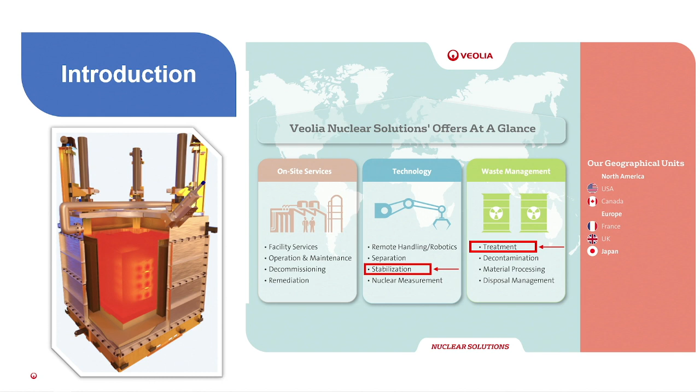And so in regards to this presentation, what we're going to cover is the two areas. One from technology, which will be GeoMelt, which I'll cover here in more detail. And the second of which is the waste management business line, which is truly the treatment aspect of using the technology to treat various waste streams.

So before we get into GeoMelt, let's talk a little bit about vitrification and the value of vitrification and why it's important. It's important to note that vitrification in the nuclear industry is the gold standard for treatment. And why is that? It simply provides the most stable form to allow for radioactive decay over time, which is our friend in this industry, obviously. Being able to stabilize waste in a durable glass form that lasts for thousands of years and is resistant to leaching is why it's important. It's also a robust process that significantly reduces the volume of waste compared to other methods.

And so one example of that, I know it might be hard to see on the screen, is to take an example of waste that we have at Fukushima that will be treated, in this case spent media that was used in the water treatment process after the accident, where you have a little over 9 cubic meters of waste. If you take that waste and you were to cement it, you have approximately 9 boxes of waste, versus if you were to vitrify it, you come away with 1. So that just gives you an idea of where the volume reduction comes into place and the advantages of vitrification.

So now let's talk a little bit about GeoMelt. But first, it's important to talk a little bit about the history. GeoMelt was actually invented in the U.S. by PNNL, the Pacific Northwest National Laboratory, near the Hanford site back in the early 80s, long time ago. It was commercialized in 1993. There was a period of technology advancement, mainly for what we call in situ vitrification, so treating contaminated soil in the ground through the process. That technology continued to develop and mature to the point where it transitioned to a secondary processing step, which we call in-container vitrification, or what we do more commonly now is melting waste in a box.

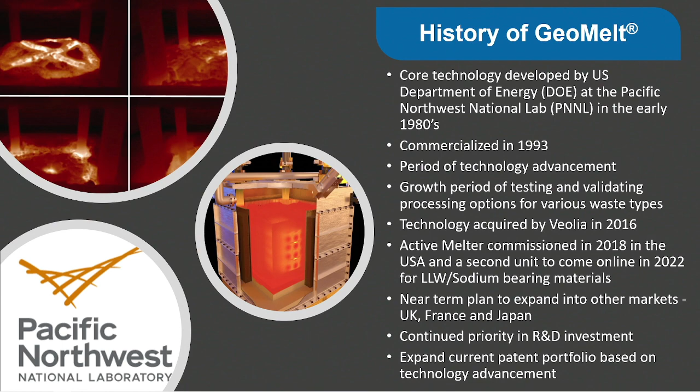One big aspect of our company, Veolia, we invest very heavily in R&D. We invest very heavily in our IP portfolio to continue to refine the process, make it better, find different ways of treating various waste streams, especially the more complex waste streams.

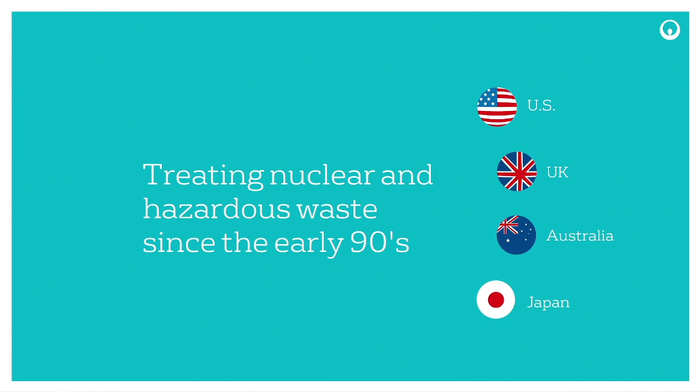And now we'll show a quick video here just about the process itself and what GeoMelt has to offer. So it is a joule heat melt process. You'll see some pictures, but what we use is electrode feeders that go actually into the melt box itself or into the ground itself to joule heat the waste or the area that may be contaminated.

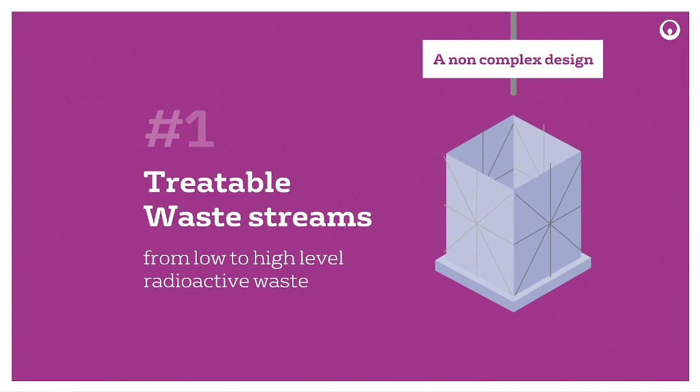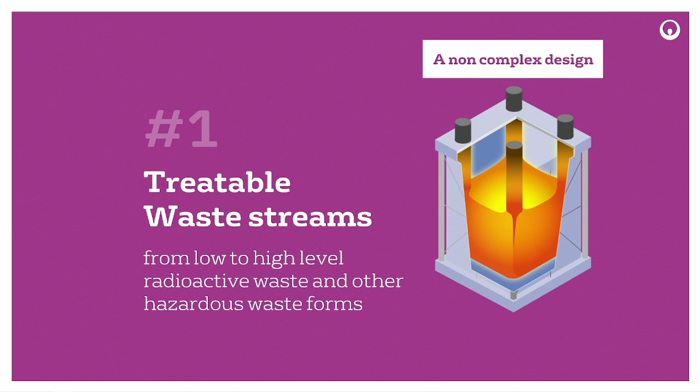In this case, you see the box itself here. We can treat anywhere from low-level problematic waste to higher level waste. So what do I mean by that? Sodium contaminated waste is the project that I mentioned earlier, but we're also treating and testing our different waste recipes or formulas for treating higher level activity waste, such as that at Fukushima for cesium contaminated waste in the media that I mentioned earlier.

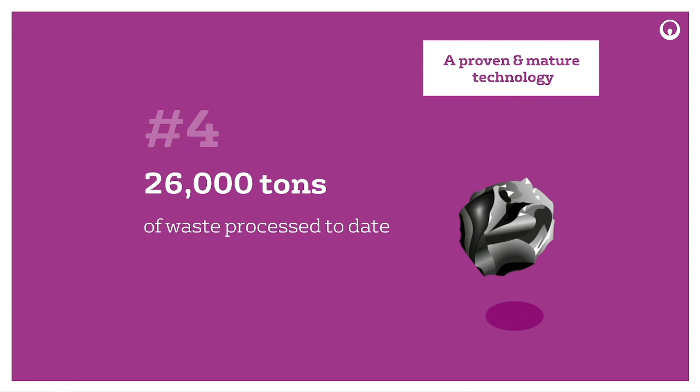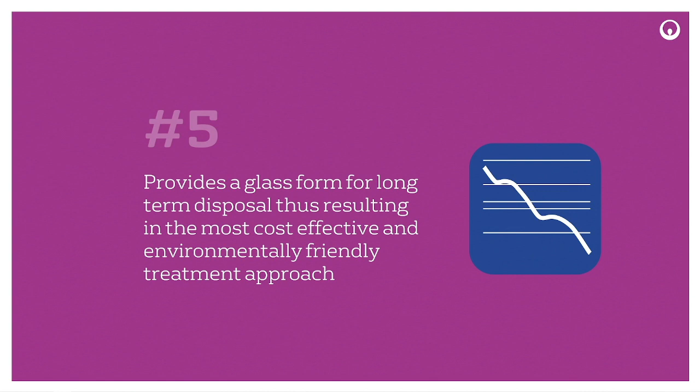So that is an example of the in situ vitrification or in-ground, mainly used for contaminated soils. And it is a robust process. It's a proven process. So 26,000 metric tons of waste have been processed to date. About 50% of that has been radioactive material. So not everything has been radioactive. Some has been hazardous waste material as well.

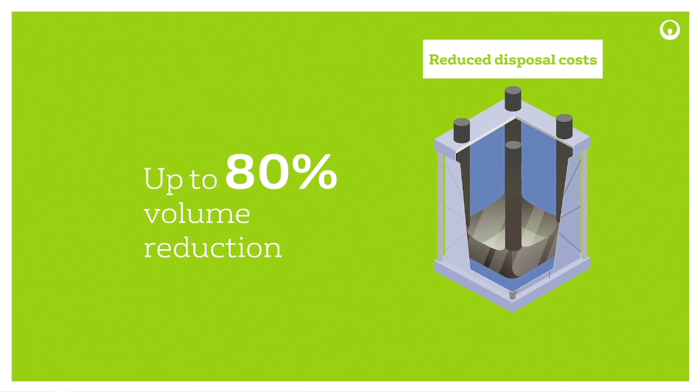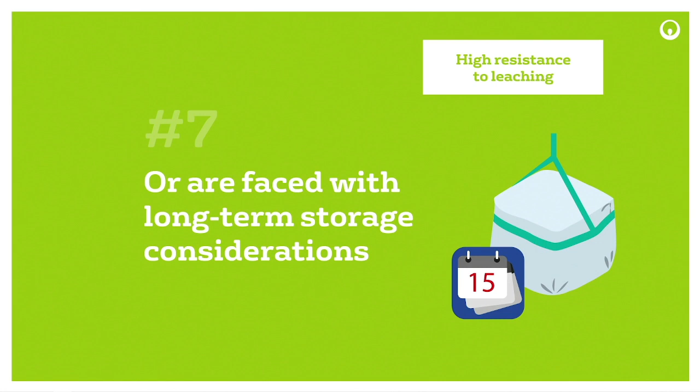So I mentioned the volume reduction, the advantages of that are you can get up to 80% volume reduction. Not only that, but once you do get that reduction, you can actually reuse that same box so you can get full capacity in your waste package before disposal. Okay. So here's another picture just showing some of the advantage of that, the two methods again for vitrifying waste.

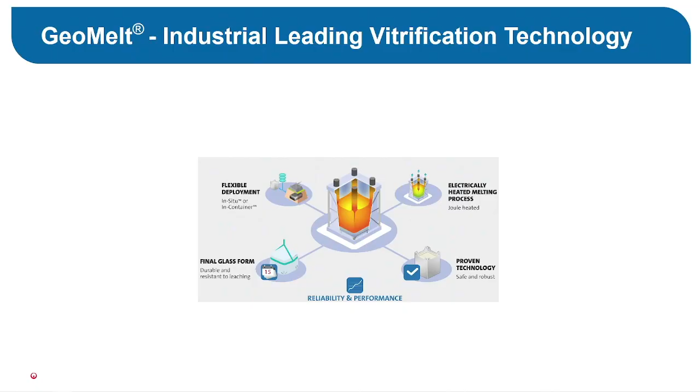And then if we look at the benefits, again, broad temperature range for different materials, for different waste types that we can dial up, dial down in order to treat. Mentioned the volume reduction, 10 times stronger than concrete. So why does that come into play is because it remains a stable waste form for much longer. I mentioned the amount of waste we've done to date.

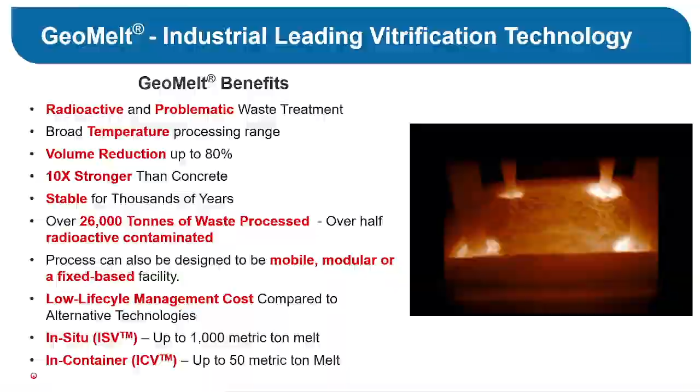Another important aspect is this system that we've developed can either be mobile or fixed base, meaning it could be in a merchant plant facility or be able to be transportable depending on the type of waste that you're treating. Okay.

So here's just an example of the two different methods that we have, the in situ versus ICV. The higher level activity waste that you have, you can actually contain the material in a box that can either be reusable if it's lower level waste, versus higher level waste, the waste package itself can be the container that is actually disposed of and act as a shielding as well. Okay.

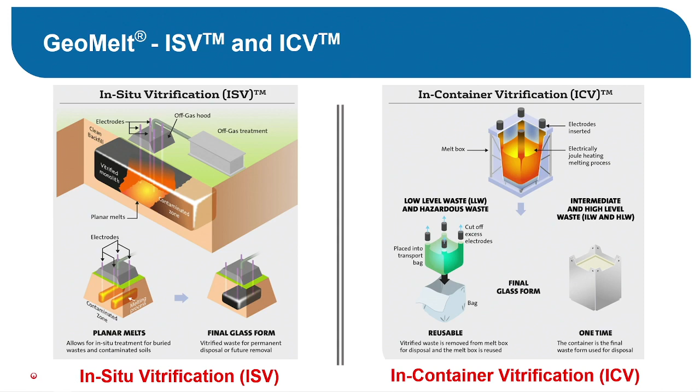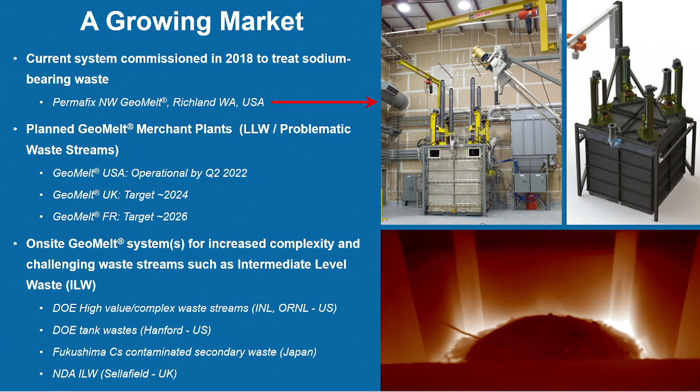Okay. Once we have proven that process and we've adapted that process to be able to look at more challenging waste forms, such as that at Fukushima, such as that in the US in Hanford for instances of Hanford tank waste, we'll be able to adapt that to on-site systems, and we're currently very active, especially at Fukushima, for treating the secondary waste that I mentioned from the water treatment process from nearly 10 years ago.

So now to talk about the project yesterday that I mentioned, we won the WNE award for product and service in terms of innovation in technology. So this project was to treat sodium contaminated waste, metal waste. Our client is Battelle Energy Alliance, which is located at the Idaho National Laboratories. A very good client, a very good team partner.

The waste that was generated came from their reactor program at INL. It produced alkali metal waste without a well-defined treatment option. So it's been sitting there, it's been stored there without a good treatment option. GeoMelt, through various testings and through various bench scale testings and analysis, proved to be a good option for this waste. So we addressed that problem with the GeoMelt technology, and we designed and built the system, commissioned it in 12 months. That was it, so very quick.

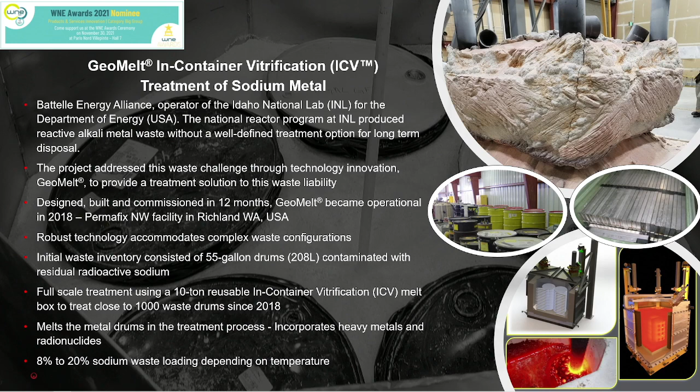The very first waste inventory that we handled were 55-gallon drums or 208-liter containers of sodium contaminated material. To date, we've done nearly 1,000 drums. There's other waste streams to follow, things that are called the zipper plates. You see some pictures of the different waste materials, sodium contaminated traps. So there's a variety of different waste forms that the system can treat.

And the other advantage is that you can actually melt the metal waste along with the sodium in a single melt without separating it.

So now let's talk a little bit about our other facilities that we have. By 2022, we will have 6 facilities of different capacity, different scale to be able to test, bench scale, or in some cases actually treat the waste. I mentioned the ones in the US. We have an additional one in the US that is purely for bench scale testing in Richland called Horn Rapids.

It's worth mentioning the system that we have at NNL in the UK is available too. I'll talk about LeMay here in a minute, but that's the newest system that we've developed and implemented. And then Daikenkyo in Japan is a hazardous waste facility where there's a GeoMelt that's active in treating mainly contaminated soil in country.

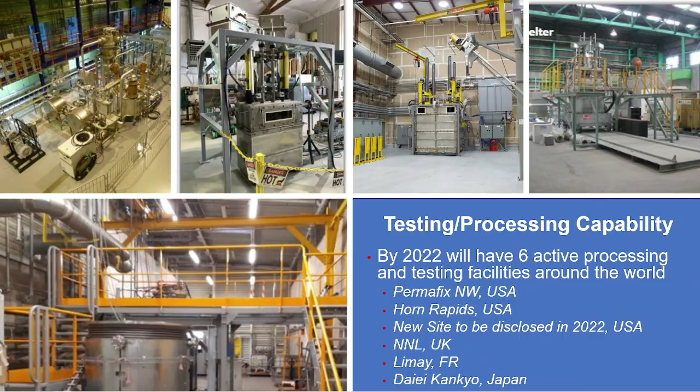So a little bit about Limay, because it is in France and it is the most recent system that we've commissioned. It's located at the Veolia Limay plant that is run by Sarpi, a sister company to VNS, for treatment of hazardous waste for incineration, cementation, and other processes. So we've been able to piggyback on that facility and implement our GeoMelt system that you see here

to be able to have a pilot system that becomes a catalyst to be able to treat and evaluate different recipes for waste, not only in the French market, but also the UK market as well. And so why is that important?

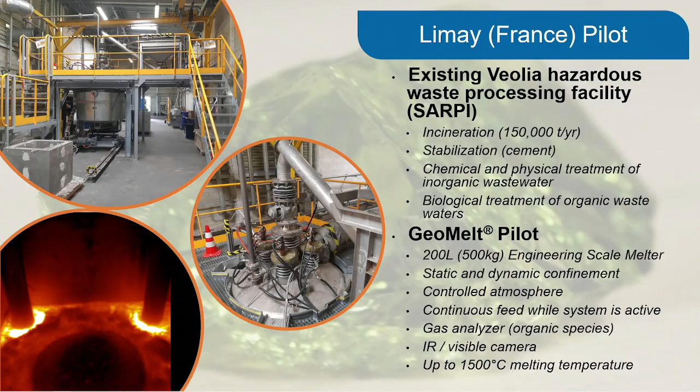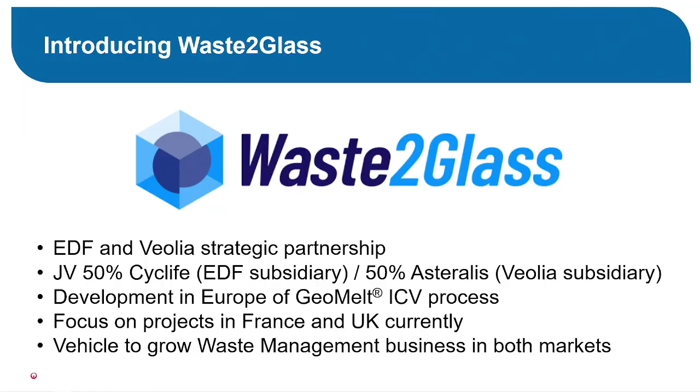Well, if anybody heard yesterday, we signed a joint venture agreement with our friends from EDF, a new joint venture called Waste2Glass. And so the Waste2Glass entity will be used as really the catalyst or the vehicle, if you will, to evaluate and look at different types of waste streams, utilizing the Limay capability to test these different waste forms and address the market needs.

So just in conclusion, VNS is benefiting from the success of the GeoMelt project in the US. It truly was a benchmark project for us to validate that it is a viable technology. It is credible, it's proven to be able to treat these types of waste forms in the industry. It has certainly helped us in Japan to pursue Fukushima waste. It's certainly helping us in the UK and France to pursue our strategy here as well.

But as the case with any project for us, alliances or partnership is key. I already mentioned Waste2Glass. I mentioned Battelle Energy Alliance. None of these things can happen without partnerships. We specialize in technology. That is what we can bring to the table. We have the experience, we have the expertise, but having those alliances and those partnerships for your different waste streams is what makes it work.

Okay. The market is large. There's problematic orphan waste streams out there that need to be treated, that need to be evaluated. So GeoMelt's position within the market is a good one. It's not the only one, but it's certainly part of the solution.

And so really the final question, not for me but for everybody, is what are your waste problems? What waste problems do you face in your markets, whether it's in France, UK, or elsewhere? And is GeoMelt a viable candidate to process that type of waste?